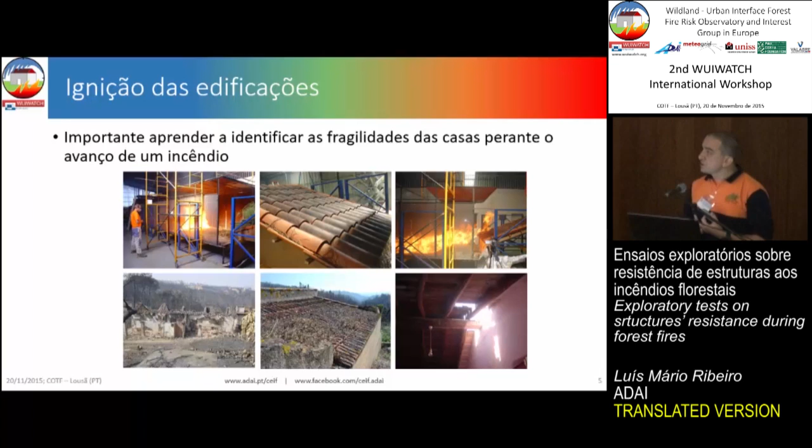And all of these issues we are studying in our lab. For several years we have been conducting trials on the resistance of rooftops to wildfires, and currently we're testing other structures. It's also important to understand the mechanisms related to fire that can cause a home to ignite.

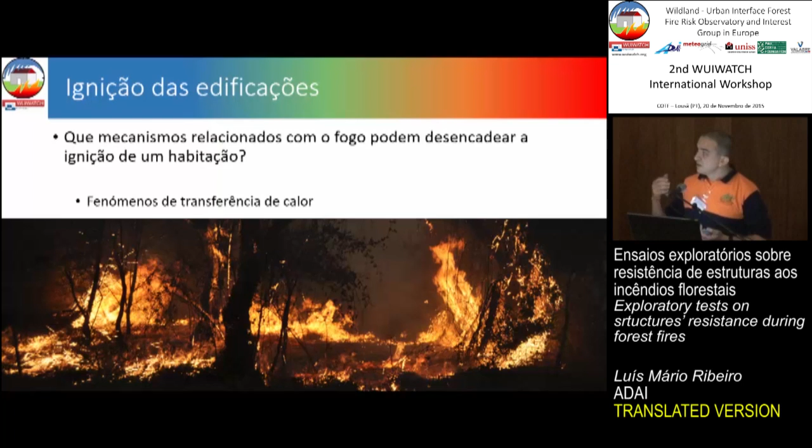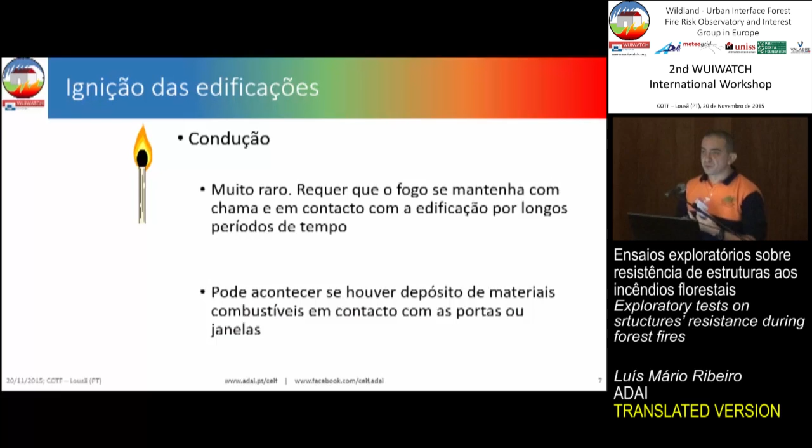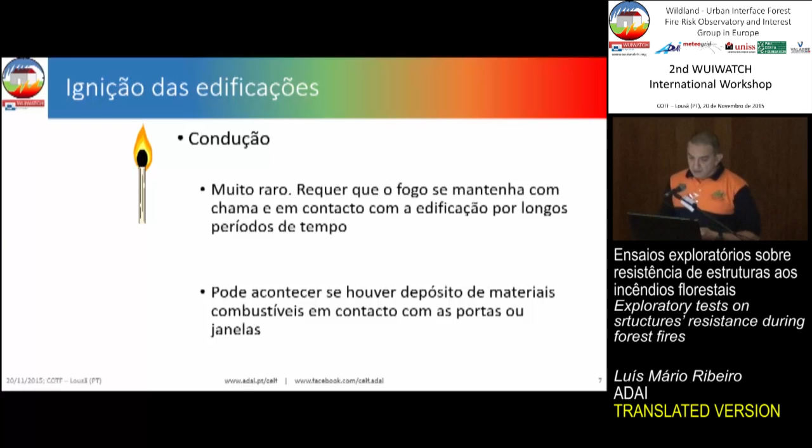These are linked to the properties of fire, one of which is conduction. Here we have a lighted match. The fact is that conduction is very rare in homes—it requires exposure to fire, to the flame, over a long period of time, but it can happen.

Radiation can also occur, and it is proportional to intensity, distance, and the length of the flame. For example, this home is a wooden home, and yet it managed to survive a wildfire.

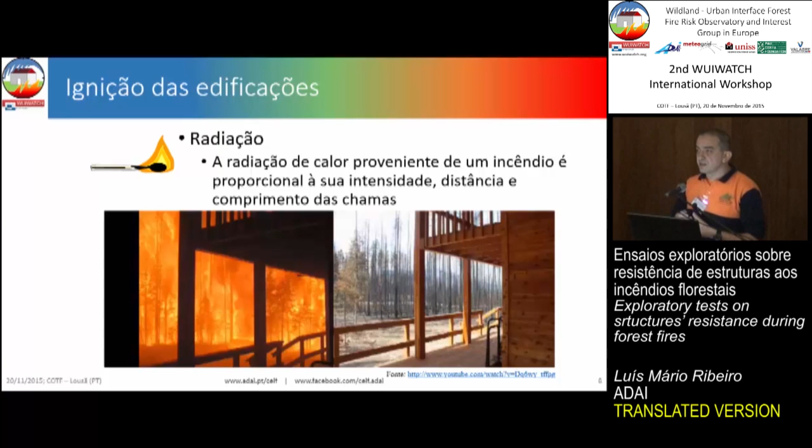Convection is also very seldom, and it also requires contact with the flame.

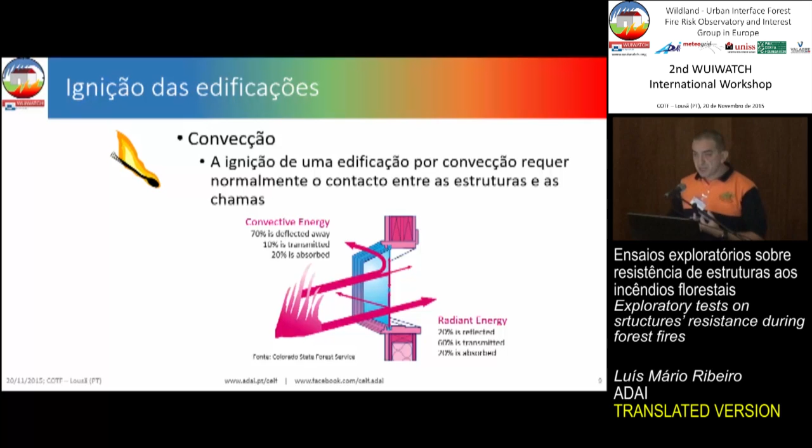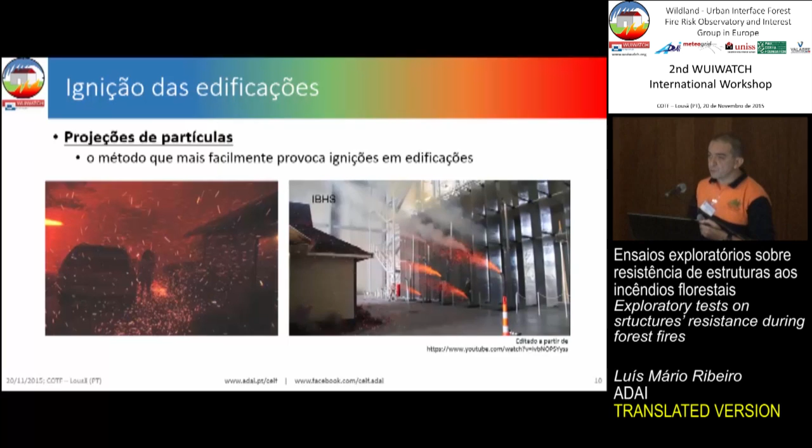Even so, we know that the most common way for a home to ignite, or for some of its elements to ignite, is through the effect of some fired elements like these.

Windows are normally the elements that are most exposed, whether or not they have shutters. In general, windows are the most vulnerable spots of homes, and for that reason we have dedicated most of our trials to windows.

The general objective was to assess the main parameters or structures of a home that are most vulnerable in the case of fire, and our intention was to understand a phenomenon like this. This was the general objective.

The specific purposes of our trials were to assess the resistance of different types of shutters to the impact of a fire front, to compare the effect of radiation and convection, and also another phenomenon—the influence of the opening of inside doors and windows and their exposure to currents.

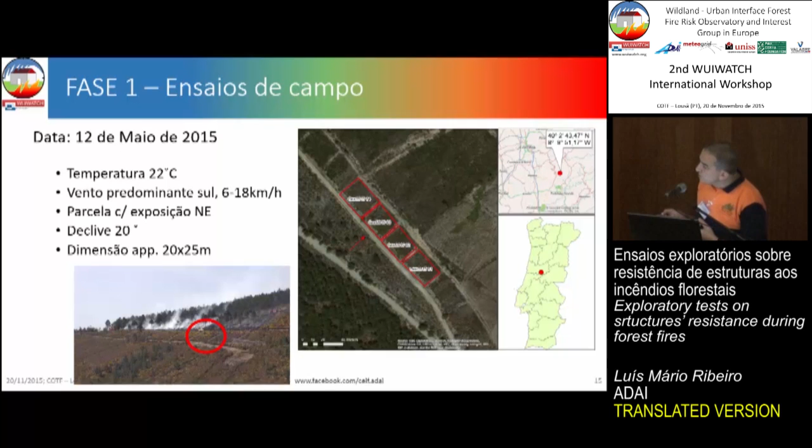This was the first stage of our trials, conducted on the field. This is an area that is well characterized. We conducted them on a typical spring day. The vegetation was studied and listed. These paths had been opened up in previous years, and our plots are the ones you see on the upper drawing.

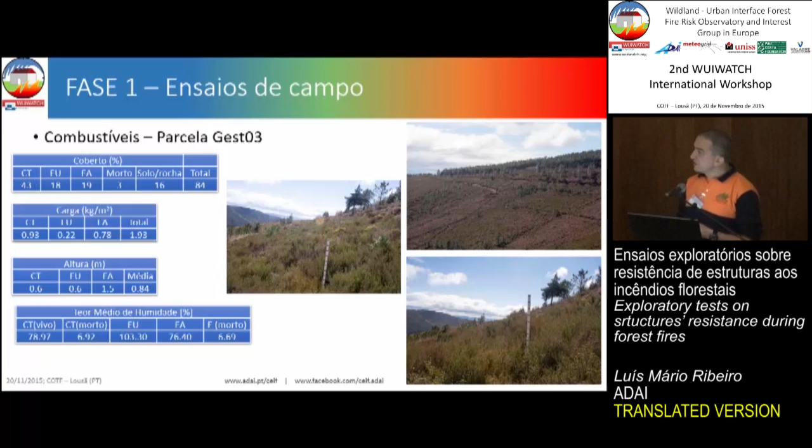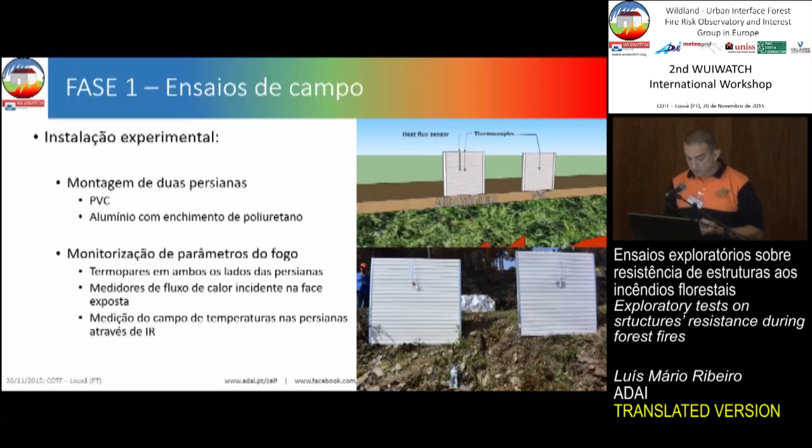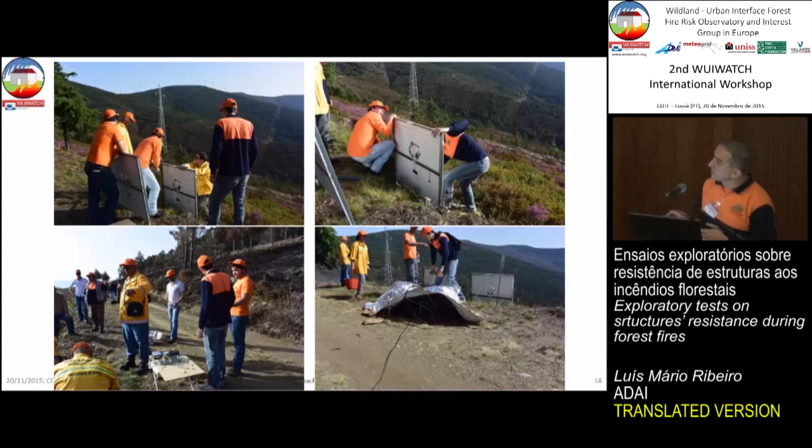So what we did was to put on the field two shutters, one in PVC, one aluminium with polyurethane filling. We installed in one of the shutters a flux meter. Obviously our system for collecting information had to be protected, so we assembled a fire shelter over our computers, and we ignited a fire at the bottom of the hill and waited for it to spread to the shutters.

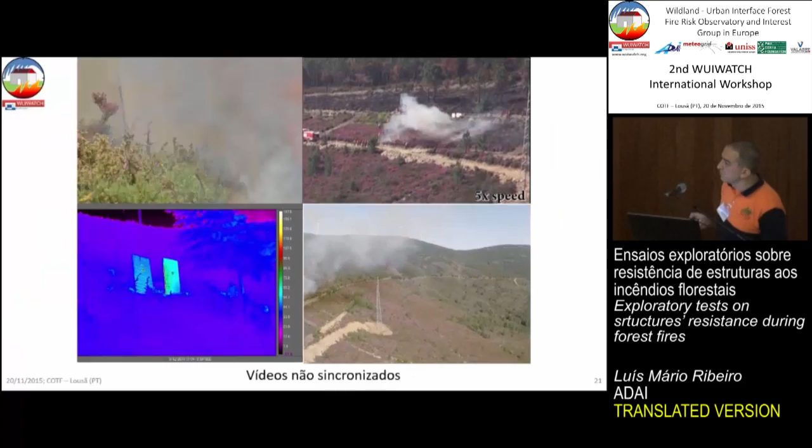Here you can see these are the general characteristics of the fire. We filmed the different stages. The bottom film was using an infrared camera, and also filming from close. And as you can see, the PVC shutter melted completely.

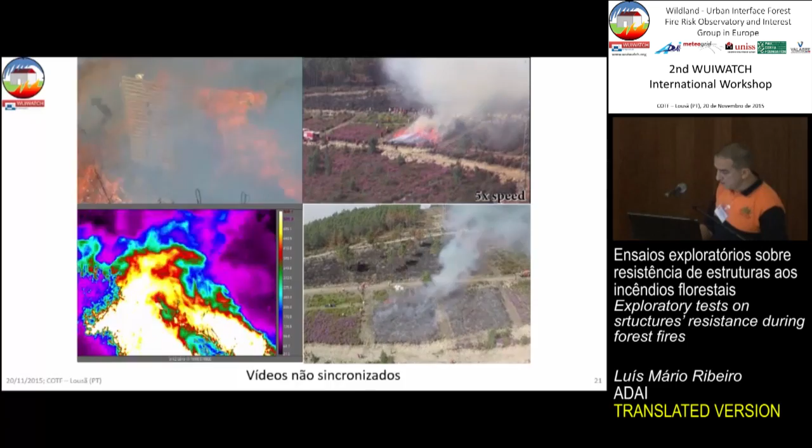This was the result. Although the fire was not very intense, it was actually 30 times more intense than we could obtain in a lab. But you can see that the PVC shutter did not resist the fire, but it did not inflame, nor did it melt into drops.

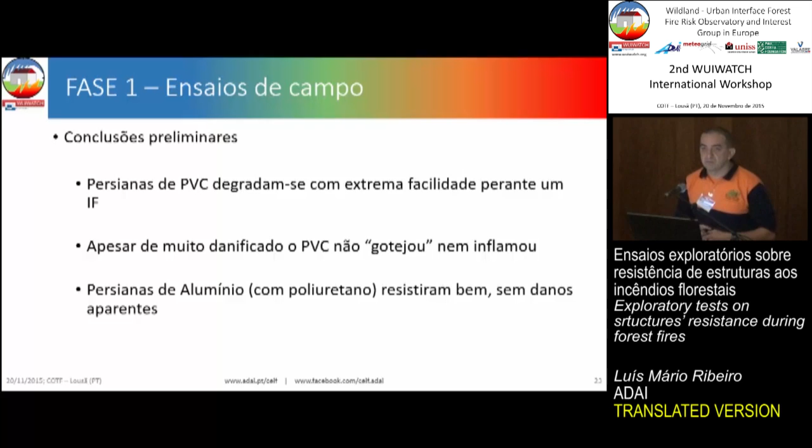And dripping is very important because otherwise it could have inflamed other elements. But the fact is they melted, and they simply melted onto the ground and stayed where they were. It did not spread or splash. The aluminum shutters with polyurethane essentially remained intact throughout the fire.

In the lab stage, what we did was focus more specifically on three aspects. First, the resistance of windows and shutters as a whole, because we did not test the windows on the field, followed by the influence of indoor and outdoor openings in the passing of air.

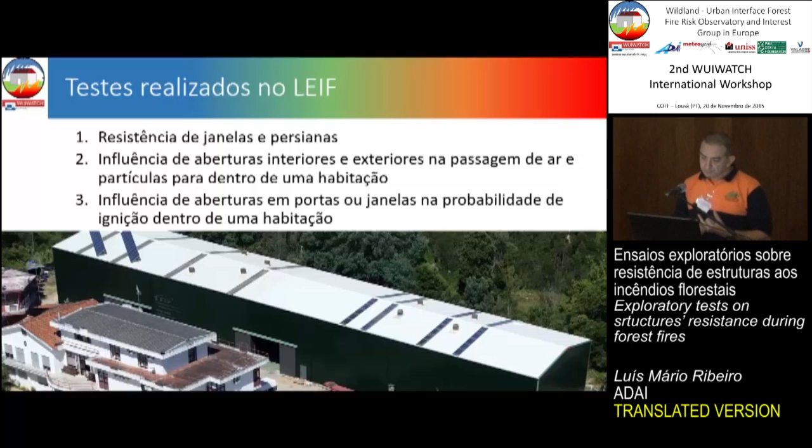We tried to address questions when we did not manage to reply to all of them entirely. We managed to obtain some kind of response, but we realized that we still need to do more work before we can understand all of these mechanisms. Nonetheless, these were our departing questions.

Can shutters be enough to protect a passing fire, and what type of windows should we use? Double glass, single glass, and based on these questions, we conducted these different tests in the lab.

We used different types of shutters: PVC, aluminium with polyurethane filling, and wooden shutters. And we tested these on the two types of windows. We tested all of this with thermocouples and also with a flow measurer.

Initially, we thought that we could also measure temperature inside the window frame, because the frame sometimes can break under the pressure of high temperatures. But sometimes windows do not occupy the whole space inside the frame, and sometimes the frames are filled in with silicone, and that could also influence the results, we realized.

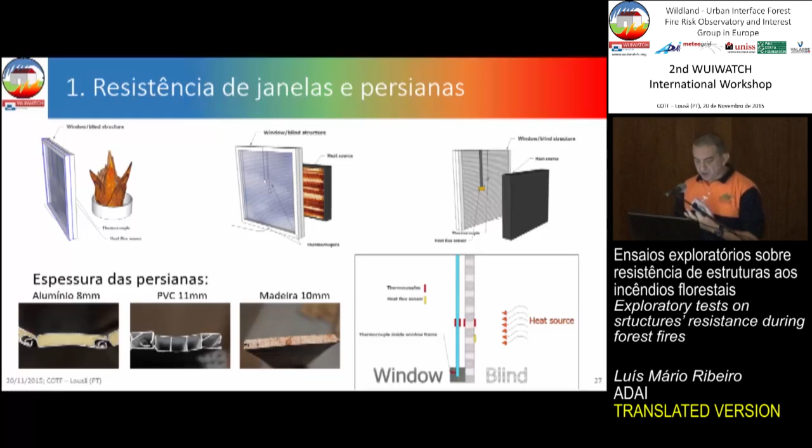And these were the parameters that we measured: temperatures on both sides of the window, temperatures on both sides of the shutters, and the heat flow and the effect of the heat flow on the shutters. And we also used two sources of emission: a radiation panel over 5 minutes and real fire.

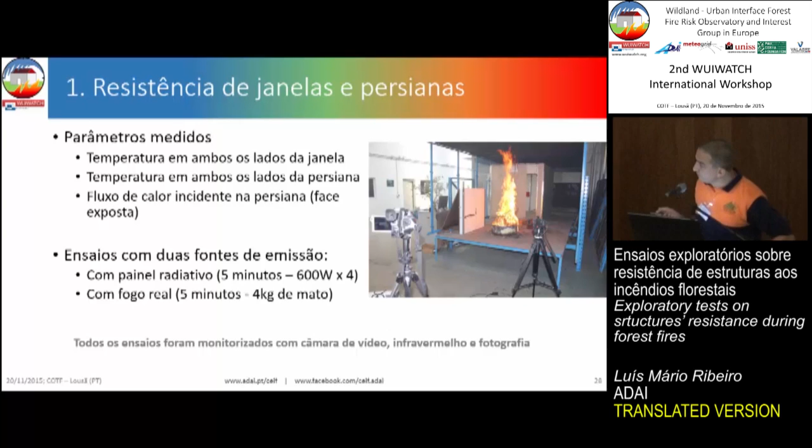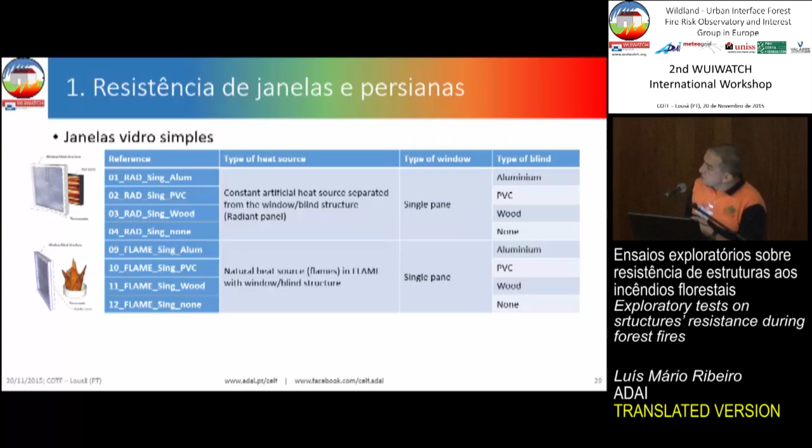This is just to show how we codified the tests. We have double glass and single glass windows with shutters and also without shutters. So we also conducted tests without any kind of protection.

This is how we assembled the devices. We assembled a frame like the one you see here, and then we mounted the windows without shutters with the different types of shutters, and we conducted the measurements.

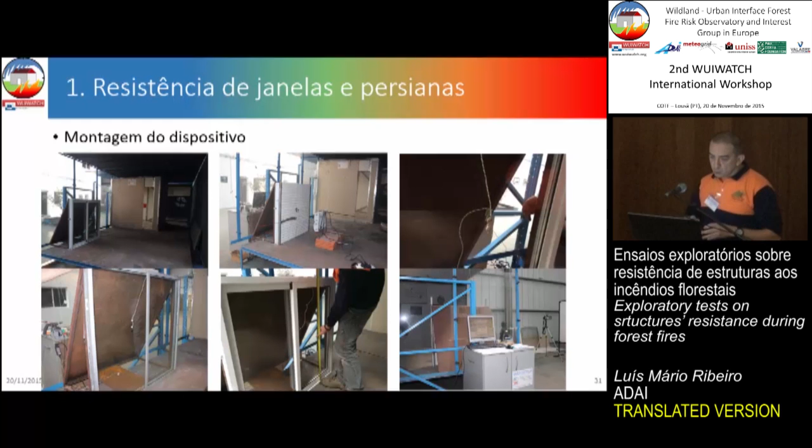Very briefly, these were the results, but many of these results we are still analyzing. But I will not go into too much detail. I would prefer to focus on the conclusions that we have managed to draw from the trials.

Anyhow, the radiation that we managed to obtain with the panel was 1.5 kilowatts per square meter, and the window temperature, every time whenever protected by the shutter, only reaches 30 degrees Celsius.

Unprotected windows, the temperature of unprotected windows increased at a constant pace. So for as long as it is submitted to heat, temperature will continue to rise.

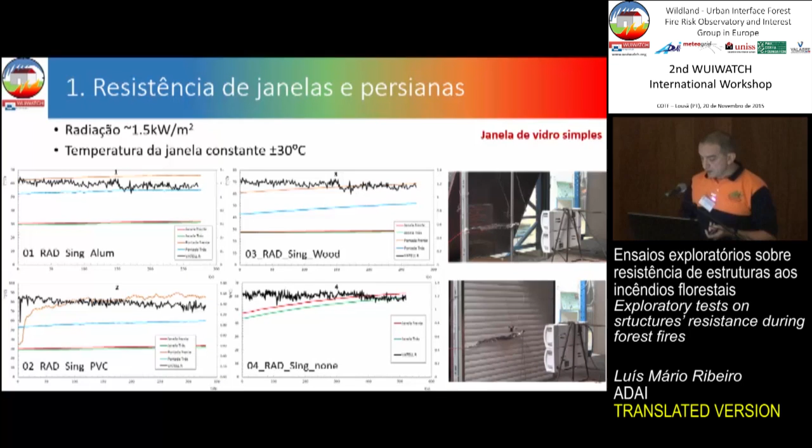The temperatures of the shutters: the PVC shutter possibly absorbed more heat, and the temperature reached as high as 90 degrees Celsius.

But if we replace the radiation panel with a fire of natural origin, so from natural elements, we would have a radiation of 10 to 20 kilowatts per square meter, but the temperatures doubled. They doubled in the exposed face of the shutter, while the window temperatures remained around the same, 30 degrees Celsius. So this suggests that shutters managed to protect the windows, with the exception of the PVC shutter that once again melted.

It did not melt entirely because meanwhile the trials ended, but at 150 degrees Celsius, once again, the PVC shutter melted. We are talking here about single glass windows. And when the shutters melted, you can see that the window temperature started to increase, suggesting that shutters play a very important part in protecting the window. Now, moving to double glass windows.

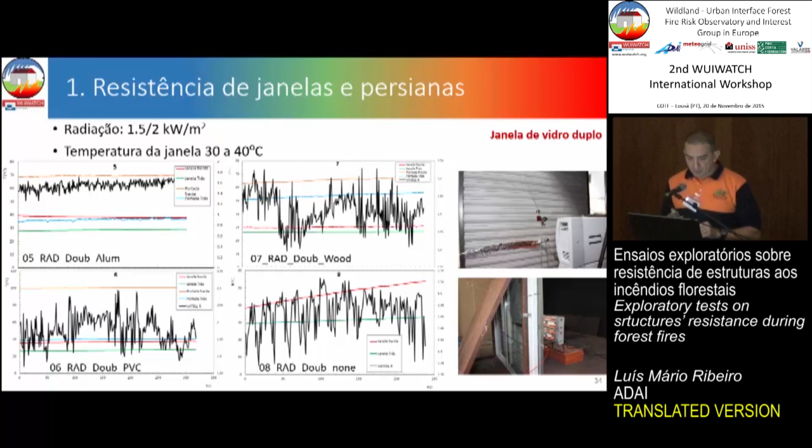And although the space between the two panes is only 1 centimeter, there is a big difference in the temperatures of the indoor glass and the glass exposed directly to the fire. Once again, the effects on the shutters are more or less the same. The PVC shutter melts, and the indoor glass continues to be protected, maintaining a temperature of around 30 to 40 degrees Celsius.

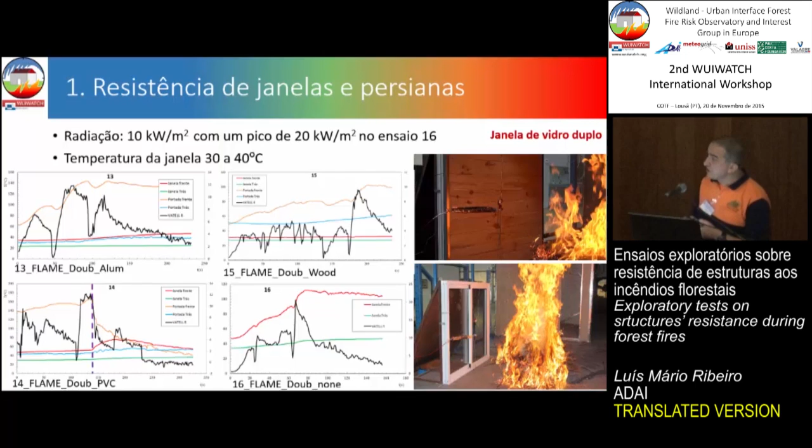PVC only resisted and did not melt in the radiation trials, where the temperature was so low it caused almost no impact. So we can say that both aluminium and wood shutters resist high temperatures. We used pine wood, non-treated shutters. But even in the treated wood, we saw that the covering melted, while the temperature remained more or less the same.

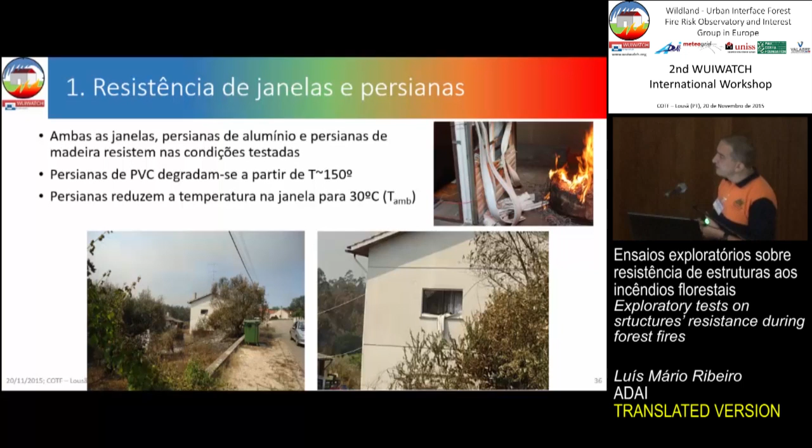We may also conclude that PVC shutters start melting at a temperature of 150 degrees Celsius. You can see here that this home resisted a fire that didn't even come very close to it, and yet the PVC shutter melted, as you can see from the picture.

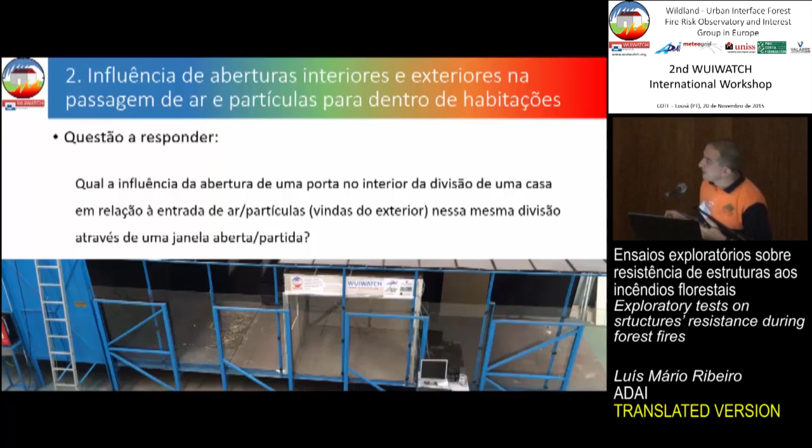What we wanted to understand from these trials was, if we have a room with a window and a door on opposite ends, and if the window shatters, what is the difference in opening the door and whether there is an air current going through the room? To test this, we built a small room, and we developed a device that we will be seeing this afternoon. It has a vent and a combustion chamber where we can put burning particles inside.

We normally use commercial pellets for two reasons: first, because they are very easy to characterize, since they all have the same shape, and second, because they are easy to obtain, very easy to buy. So we built this home with a removable door and a fixed window. From the inside and from the exposed side, we mounted thermocouples.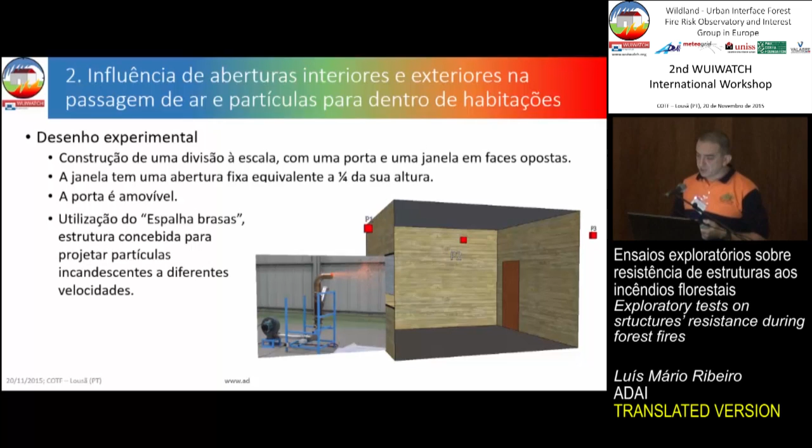This afternoon you will be seeing this, but this was one of our combustion tunnels. Then we have a channel here, and we adjusted a D curve to prevent the dispersing of the particles. We have the combustion tunnel, and this is the home that we have here.

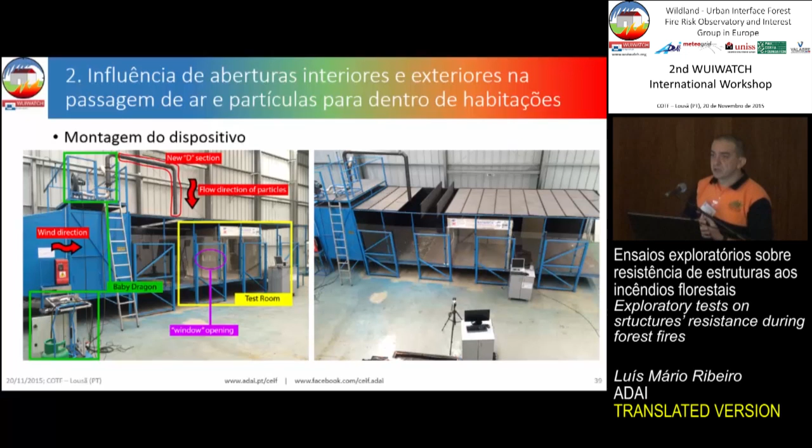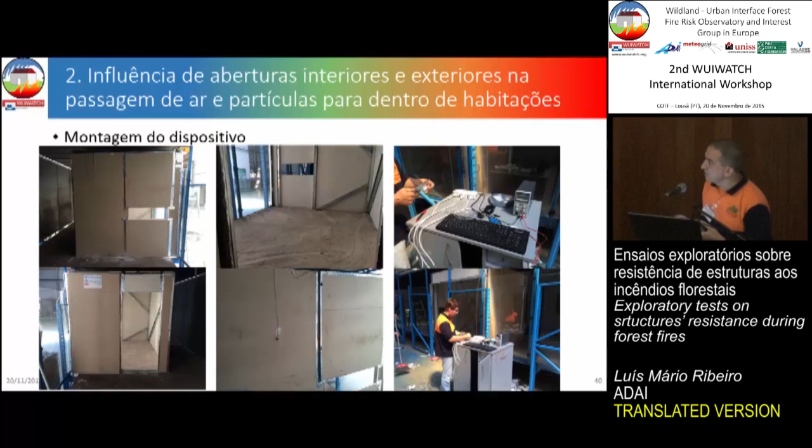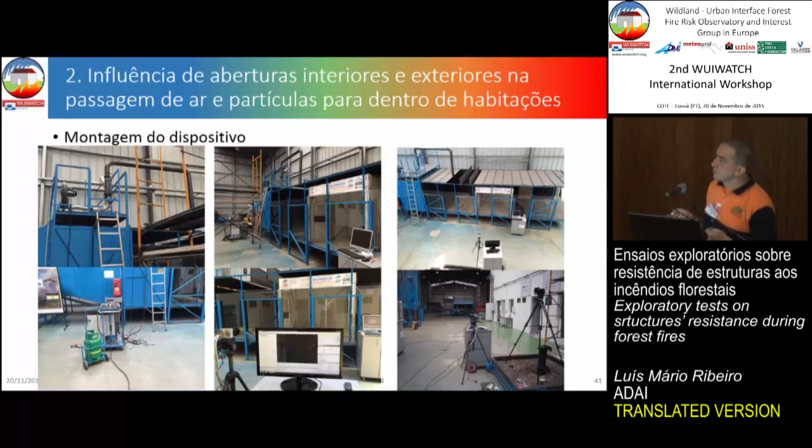We conducted measurements not only with thermocouples, but also using PIV technique, high-speed cameras, and software that allows us to count all of the particles. This is pictures of the assembly. We filmed, obviously, and we also conducted some tests to determine the right type of assembly.

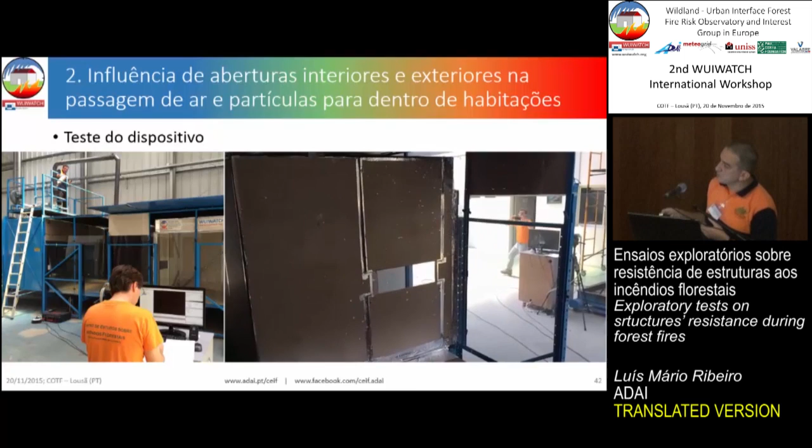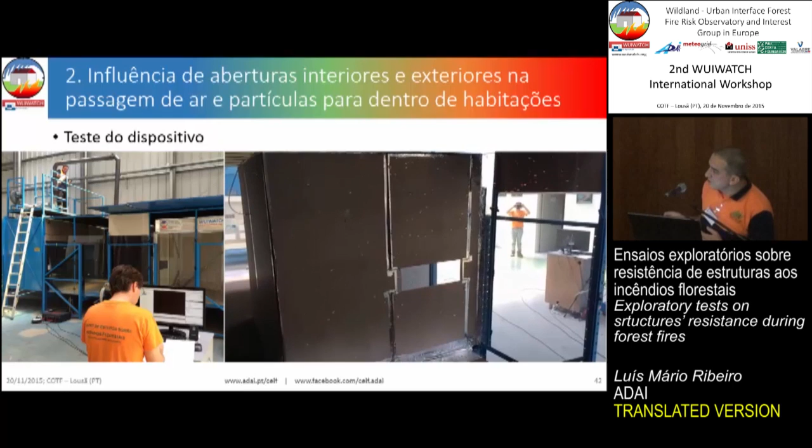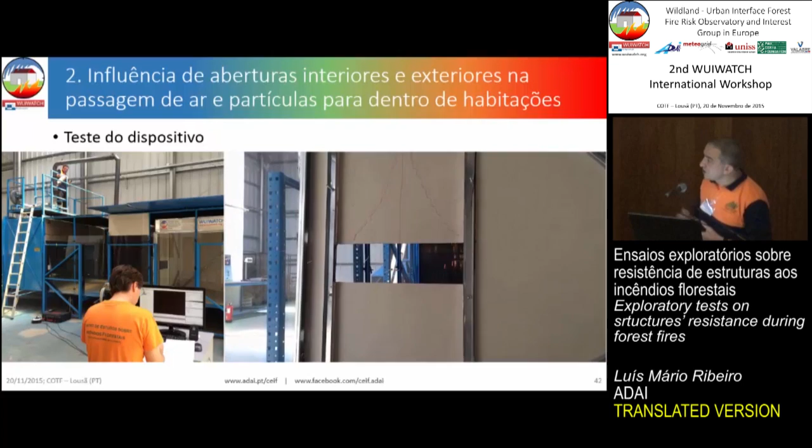We also had tubes linked to the vents. We thought they would resist, but they also melted. So in the end, we had to take our device and assemble it on top. These are the pictures that we took around the room, and we remained outside of the combustion tunnel.

We conducted two types of tests: one with particles, as you could see from the device, and another where we removed the particles and only used wind, stronger wind, with which it was easier for us to measure pressure currents. The door was opened completely, half opened, or completely closed. These were the three parameters we used, and we arrived at very interesting results.

First, in the measurement of pressure from the projected air: when the door is closed, we have a positive differential of 1 unit from outside to the inside, which means that the pressure inside the room is higher than outside of the room.

As soon as we opened the door halfway, the differential is reversed and is multiplied by 6. In other words, the pressure outside is 6 times higher than the pressure inside the room.

With the door totally opened, the pressure continues to increase, but not as much. This clearly indicates the importance of having the door closed or opened.

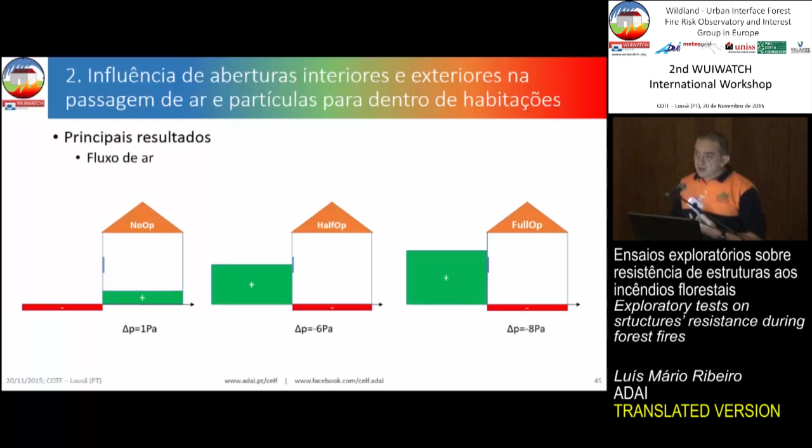So this test clearly illustrated what we can expect or what we should do in case of a fire. The window may not be opened, but it can shatter in case of a fire. So having the door open or closed can make a significant difference in the amount of particles flowing into the room.

Then we conducted a test with gaps. Any type of gap, it can be a crack in a door, in a window, in the wall, or an open door. So we mounted this structure here, this device that was coupled to a table and a metal plate that you can see here. This is not glass.

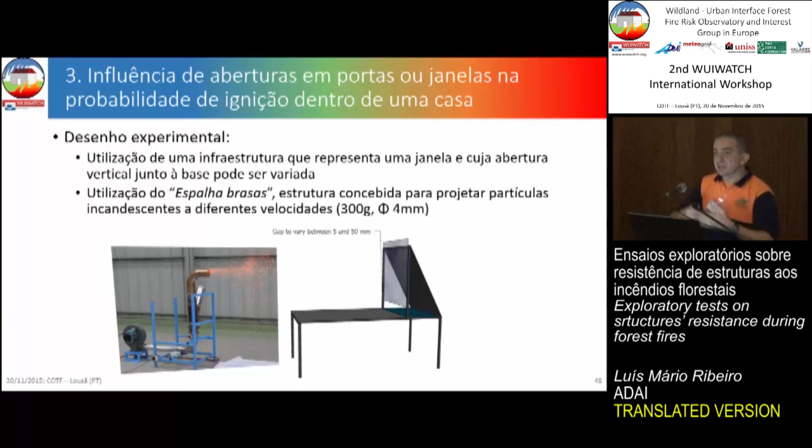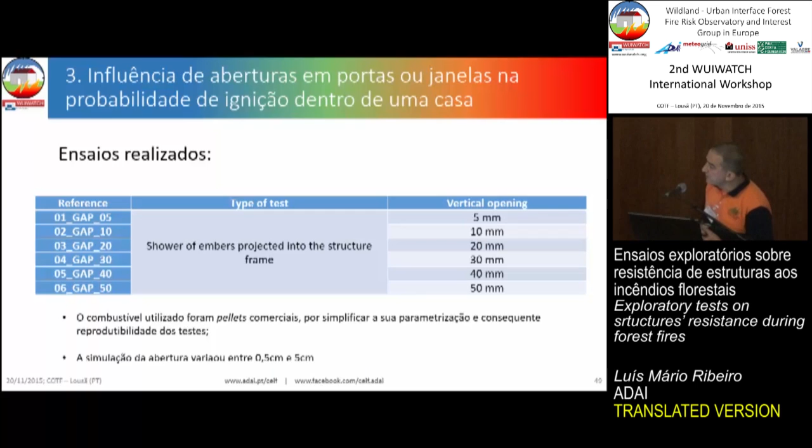We had gaps ranging from half a centimeter to 5 centimeters, and we used commercial pellets. These are pictures of some of the tests that we conducted. Some of the particles hit the plate and are projected.

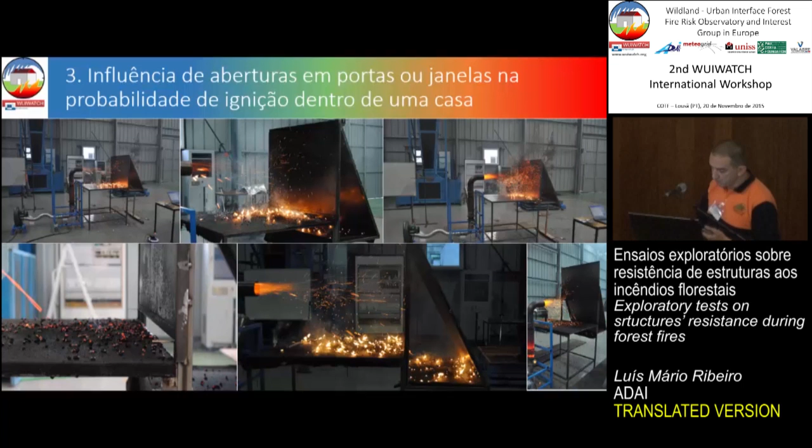So from 3 to 4 centimeter gaps and all the way up to 5 centimeters doesn't make any difference. To have a window 3 centimeters open or 5 centimeters open doesn't make a difference in relation to the amount of particles going in.

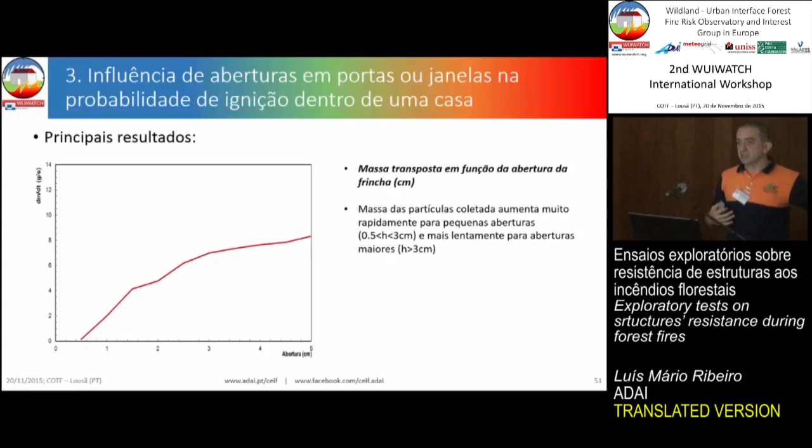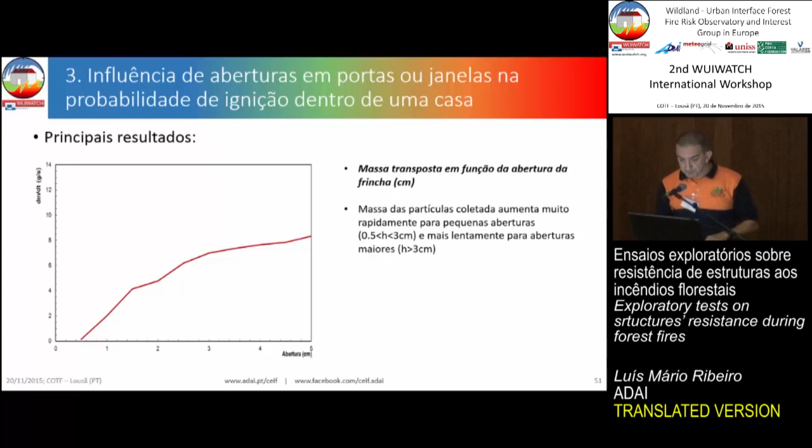The trajectory of the particles is slightly descending, and this means that regardless of the size of the gap, as long as there is a gap, particles can come in.

So the main conclusions we can draw from these studies is that PVC melts and therefore doesn't offer much resistance. 150 degrees Celsius is the minimum temperature for PVC to start melting.

Wood, we cannot be sure about the level of resistance of wood. We simulated wood shutters using pine wood, and we did not use treated wood, which is not the reality, because normally wooden shutters use other types of wood and are treated.

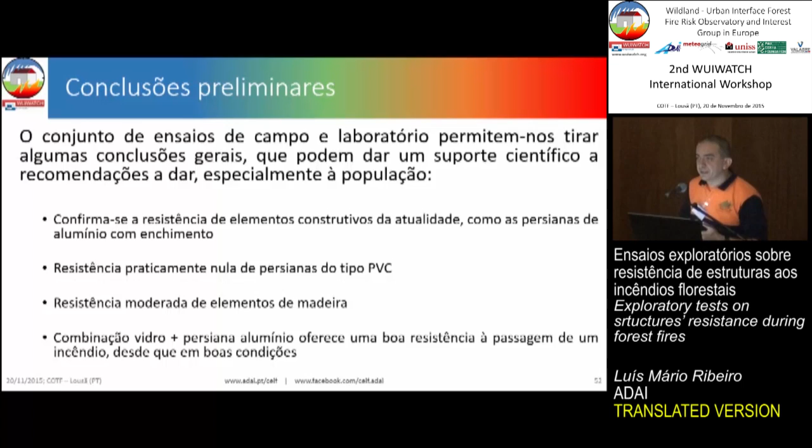So we cannot be sure up to what level of temperature wood can resist fire. The combination of glass and aluminium shutters can offer good resistance to fire attack, as long as these materials are in good condition.

I've already mentioned this: indoor doors being closed or open influence airflows passing through the home, and gaps, even if they are very small, very narrow. For example, in summer, sometimes we have our windows slightly open to let fresh air come in. But even if the gaps are very narrow, particles can come in.

So from a certain breadth, it is irrelevant whether the windows are half open or completely open.

We would still like to conduct further tests and test other materials and other parameters, like the resistance of windows and shutters to fire of higher intensity, and if the windows or shutters are submitted first to fire and then to water during the extinction phase. We would also like to conduct tests with increased flows of particles.